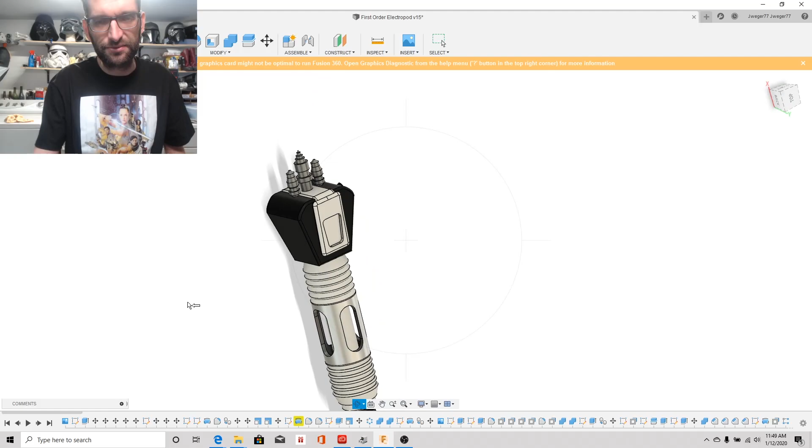So here we have the model. Let's get rid of that canvas so it's not quite so distracting. We have the model of the Electropod that we can look at, that we can zoom into, and as you can see is made of a bunch of different parts. So I designed this so that it can be 3D printed, hopefully relatively easy. And there's going to be some goofs and stuff and things that aren't quite perfect and that you might have to work on a little bit to get to fit right. But I did model all these parts that are shown as different colors.

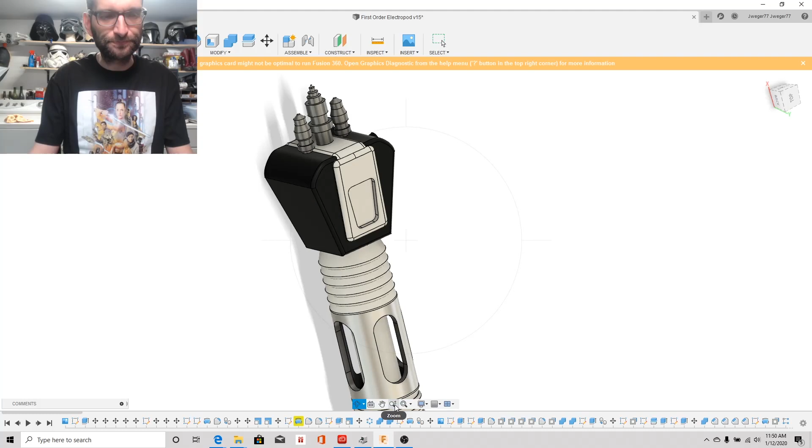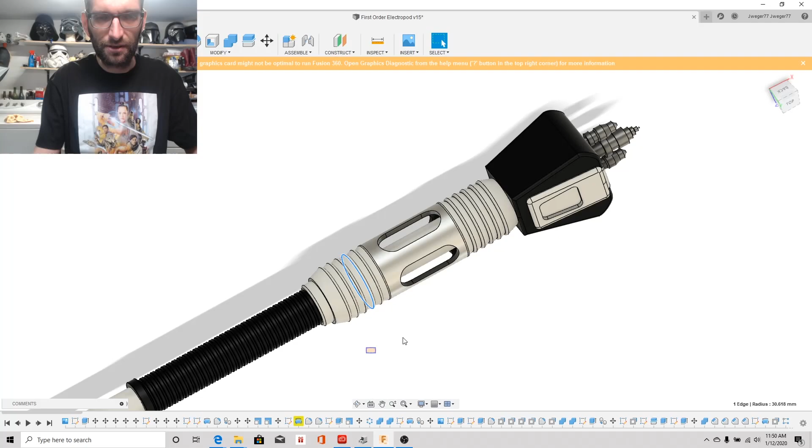So say, for example, the main body of this right here, the black part is one piece. Each one of these electrodes is a separate piece. The white piece that's trim here is a separate piece as well. And then there's a little black cover on the back here, that's a separate piece as well. And then going down through the rest of things here, each one of these sections are individual parts.

The grips are separate parts. This front, the box with a meter on here, is a separate part, another grip. And then we get down to the bottom, another grip at the bottom, and then the base.

Now the thing that I did to make this easy, because this is a 6 foot long prop and we want something that's durable and that's gonna stand up over time, is that I made this so that this part right here, the main part, the white shaft that's on there, is just a piece of Schedule 40 1-inch PVC.

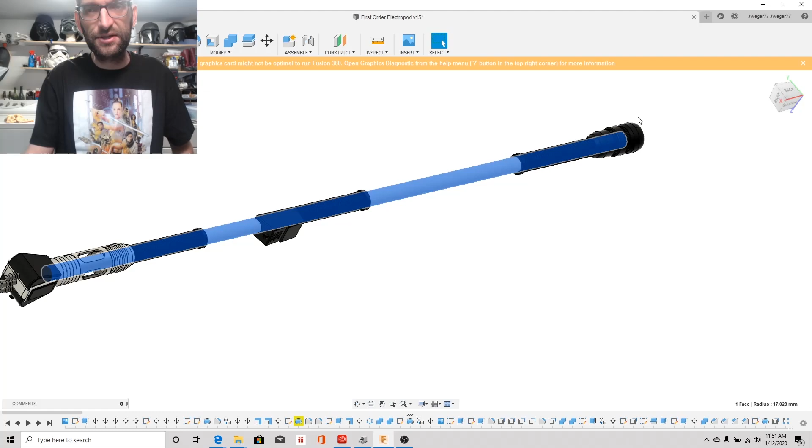Makes it really easy, so all the parts are modeled around fitting around that as a central core to the Electropod. But the TKs that are on there, the First Order TKs, well this is going to be great because this will give us a secondary weapon that we can use in events where blasters are not allowed.

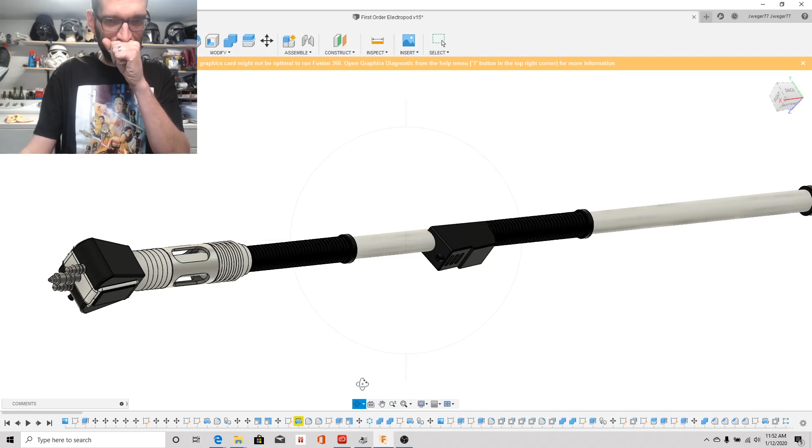So the whole intention of this was to be a learning experience for myself, but then after I started doing it and shared it, I said okay, well what I'll do then is I'll print one for myself and see how it comes out, and then I'll release a file so that people can go ahead and make their own.

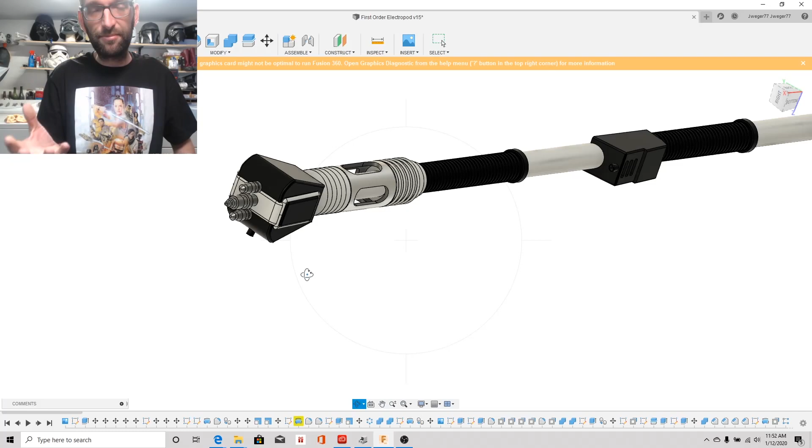So there's a look at the model.

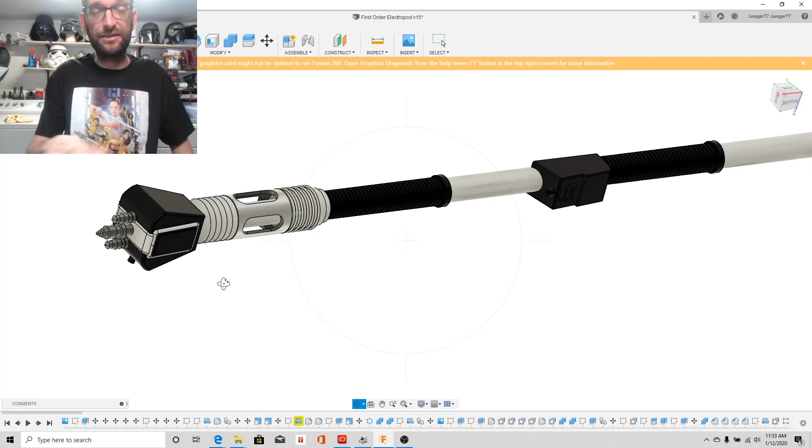All told, to model this, it probably took me 3 or 4 hours to do that. Again, I'm not very proficient with this yet, but I learned a lot in just doing this little thing right here. So let's jump back off of the computer.

We'll get into the shop. I'll show you the printed parts, and we'll get putting our first order Electropod together.

So we've got all of our pieces. We've got everything printed. They're all right here, all the parts that we're going to need. And again, to base everything, what this is all built around is a piece of Schedule 40 1-inch PVC pipe to make things very nice and straightforward.

So parts we have, assembly is not going to be anything terribly complicated here. We have 3 grips: one for the top, one for the bottom, and one for the middle here, a base piece, a couple parts for the top, and then of course the top that has the Electropod electrodes on there.

So for the bottom here, we're going to get on one of these grips, slide that into place, take our bottom piece. I'm not going to glue anything on or together right now because I don't really need anything to be permanent. Slide that into position. There we go. There is the bottom, as it looks done.